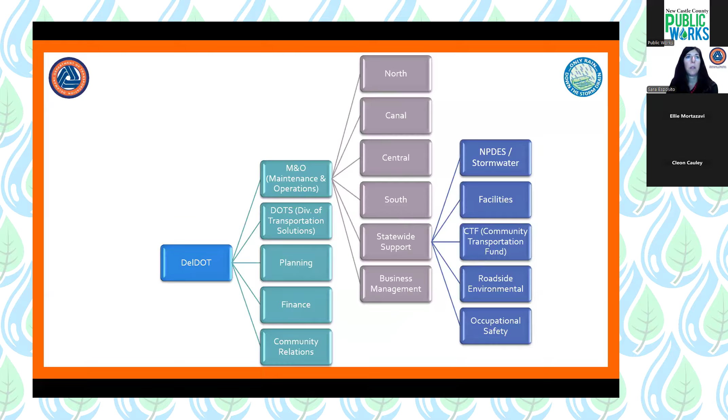I am going to go over who to call within DelDOT with some questions that might arise for you or your community. Let's take a step back from just stormwater specifically and look a little bit more at DelDOT as a whole. Wally here will be helping me along the way.

DelDOT is pretty big and we have multiple divisions. We're going to start in Maintenance and Operations, or M&O, and talk about our North and Canal maintenance districts. Those are the two districts that handle all of New Castle County. We have two other maintenance districts, Central and South, that handle the southern part of the state. We'll also talk about our statewide support services section that houses the NPDES Stormwater Program, which is the program I'm in, as well as our CTF, or Community Transportation Fund.

We'll touch on our snow reimbursement program within business management, and then we'll also talk about our Division of Transportation Solutions and Community Relations.

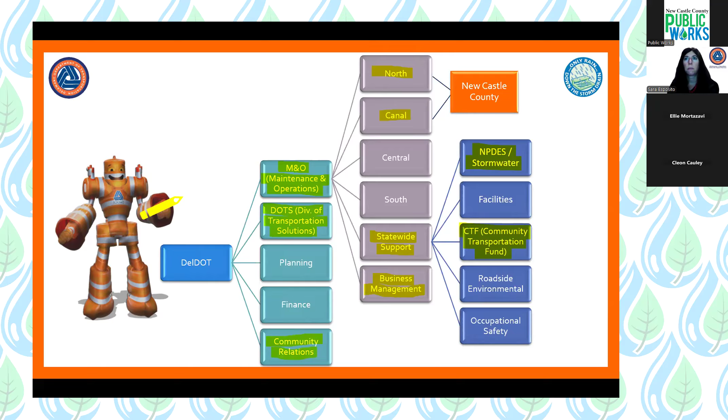Getting started in maintenance and operations, our North District is the northernmost section of Delaware, fittingly, and it is broken down into two main areas that take care of all the roadways within that area by mowing, snow plowing, fixing potholes, picking up trash, etc. within that region. So we have Area 11 shown here in purple.

That's our Kiamensi maintenance yard, and they handle all of that portion. Then our Talley maintenance yard, Area 12, handles the upper northeast corner of Delaware.

North District also has three other areas that handle specialty items, special projects, our expressways section that handles 95, and then our building and bridges section. Here's the contact information for all these locations. You can take a picture, or as Mike mentioned, this presentation will be posted after the presentation.

The southern part of New Castle County is handled by our Canal District, and it is also broken into two subzones. Our Middletown Area 9 maintenance area handles that area in green below the canal, and then our Bear maintenance area handles that section shown there in orange above the canal.

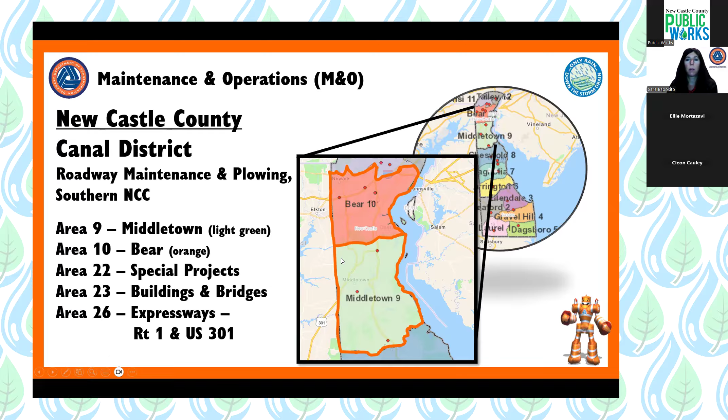Similarly, they also have some specialty areas besides just the two roadway crews, and the contact information for those yards are also shown.

But Wally's here to give you a public service announcement. Number one, the maintenance yards are not DMVs or permitting offices. So although I showed the contact information and the locations, you really shouldn't need to call them or go to them. At the very end of the presentation, I'm going to give you the best phone number to contact that will handle most of any concerns you would have.

Public service announcement number two, you can use the DelDOT app to find out information that you might need. There's a bunch on there. Two that I've highlighted are report an issue, where you can alert us of trash, a pothole that needs to be fixed, any accident, any concern you might have on the roadway, as well as our snow tracker app, where you can see if plows are going to be near your subdivision or main roadway in the near future.

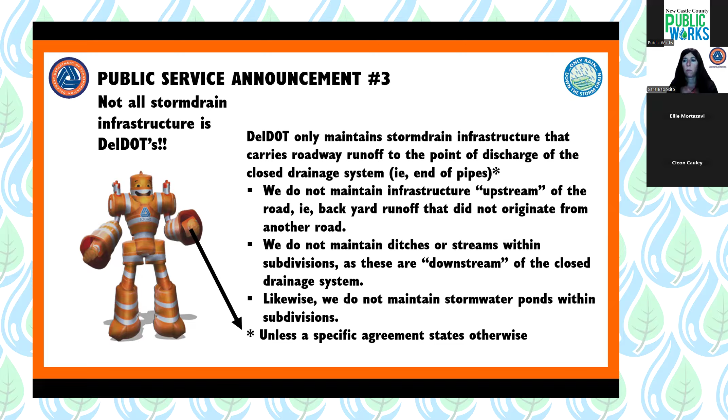A caveat to all that would be, unless there's a specific agreement that states otherwise. There are a few subdivisions within the county that have shared use agreements, where both the subdivision and DelDOT's water are both treated in that facility. So that would obviously supersede what I just mentioned.

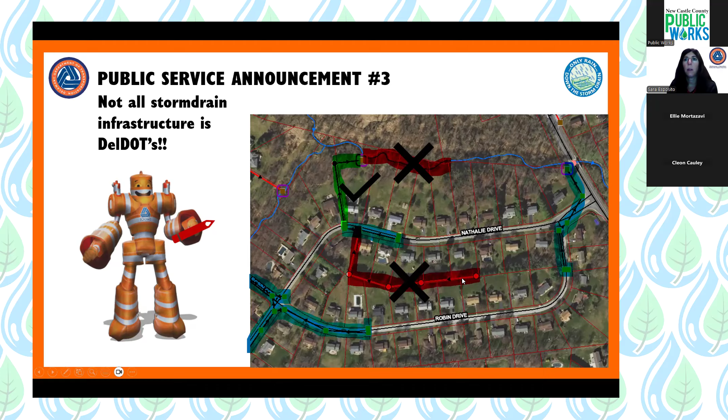So if we look at an example, this is a DelDOT maintained subdivision road. DelDOT would maintain the roadway infrastructure on Nathalie Drive, as well as the rest of the roadways within that community. We would also maintain the pipes downstream of the roadway, as long as those pipes are in a drainage easement and they were there at the time of recordation. But we would not maintain the stream within the subdivision, as that is downstream of the end of the pipe. And we would also not maintain upstream of the roadway that is collecting back of lot drainage, because it's not collecting any roadway runoff. That's true even if that infrastructure was put in place at the time of initial subdivision construction and has been there forever. Because it does not carry any DelDOT flow, we would not maintain it.

If your community has such examples of pipe outside of DelDOT's maintenance purview, then one potential avenue for assistance with drainage issues could be the New Castle Conservation District, and their information is shown there.

Also within the NPDES program, we work hard to make sure that clean water is leaving our storm drain pipes. We inspect our outfalls and screen for pollution, and then if we find it, try to track it back and eliminate that pollution along with the county's assistance.

We, along with the county, maintain this hotline, 302 Stop It, along with 302stopit.org as a website you can utilize to report a water quality concern, whether it's dumping, severe erosion, or anything where you're concerned that pollution is affecting our stormwater. We'll go out and investigate and try to coordinate a fix.

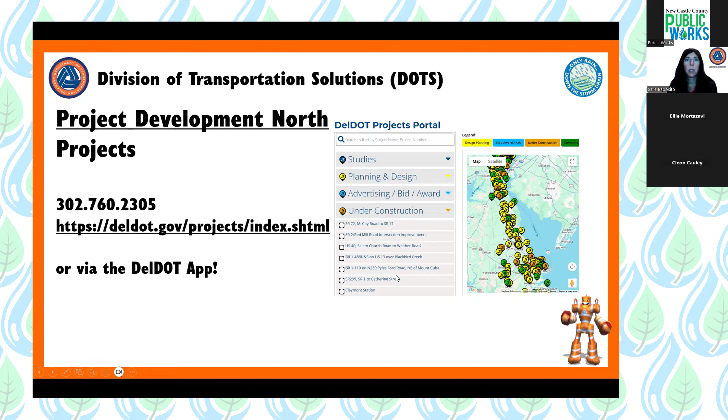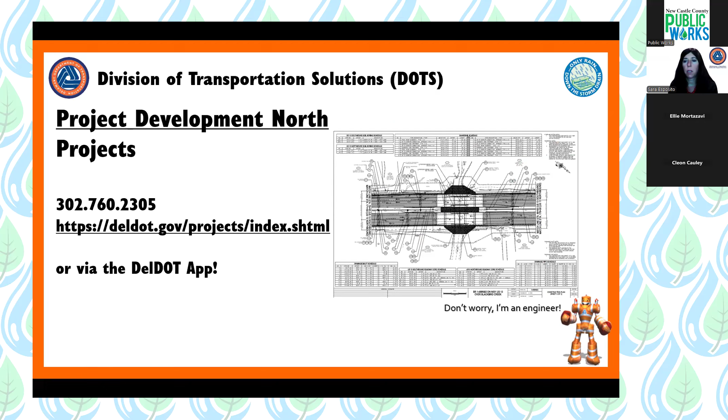You can get all sorts of details, including some of the engineered design plans, which can be a little intense. Most projects also have public workshop information that shows more conceptual renderings of what the project will look like at the end.

They also help coordinate the Adopt a Highway program. If you're a community or affiliated group interested in adopting a highway, it's a great program, and we appreciate all the volunteers out there that help keep Delaware litter free.

We try to keep things informative, but also light where possible. I'm sure many of you have seen our signage, which again is also aimed at being informative, but keeping it light and funny.

At one point we stole my slogan, 'Who you gonna call?' And I'm going to tell you who to call. The best number you can remember, and potentially store in your phone—I have it stored in mine—is our Transportation Management Center, or TMC, at 302-659-4600, or pound 77. That brings you to our 24-hour operations hotline, so it's always staffed and able to take a call.

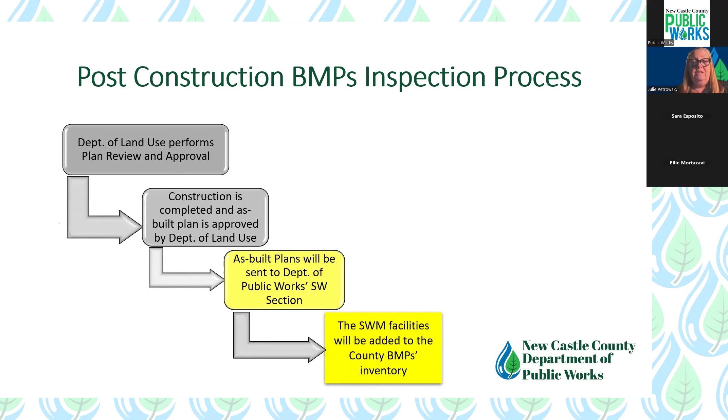Post-construction BMP's inspection process. This is just the outline. So first, the Department of Land Use performs a plan review and approval. Construction is completed, and the as-built plan is approved by the Department of Land Use. Then the as-built plans are sent to the Department of Public Works stormwater section, and the stormwater facilities are added to the county's BMP inventory.

The 2025 BMP inventory: the total number of BMPs for 2025 is 2,955 facilities, and we're just about complete with inspections for this year. I think we have about 100 left to do. It's a mixture of BMPs such as residential, commercial, and industrial sites. On-lot residential BMPs are exempt and not included in our inventory. All BMPs built pre-1991 are also included in our inventory. On average, between 80 to 100 BMPs are added to our inventory each year, so it will be well over 3,000 for 2026.

Once the inspections are completed by the inspectors, letters and inspection reports are sent by email to the president and board members of the homeowners associations or maintenance corporation, with a timeline for performing necessary maintenance. Questions about inspection reports should be directed to the inspectors of New Castle County Department of Public Works Stormwater Management section.

After you receive the inspection report, obtain a copy of the operation and maintenance plan for the stormwater management facility of your site if available. Sometimes we do have older sites and it's hard to find the plans, but we do our best to have them available for you. Obtain a copy of the as-built plan as well as the landscape plan for those stormwater facilities if available. We also suggest hiring a professional contractor who's familiar with the type of work that is needed.

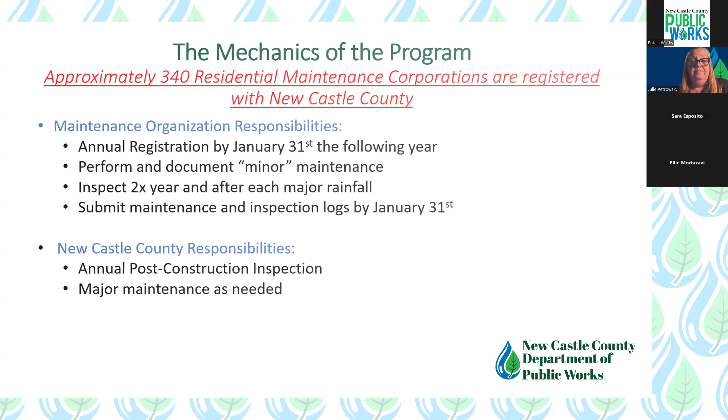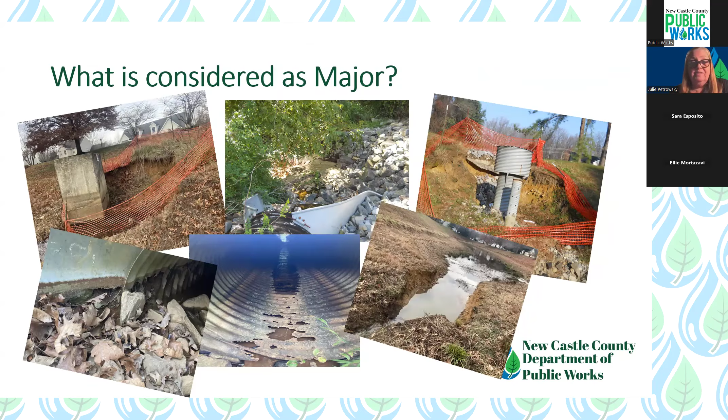So what is considered major? This is what we have seen over the years. When it's major, when it starts failing, it goes quickly. So we have quite a few of them out there. Let me show you some before and after pictures of major projects.

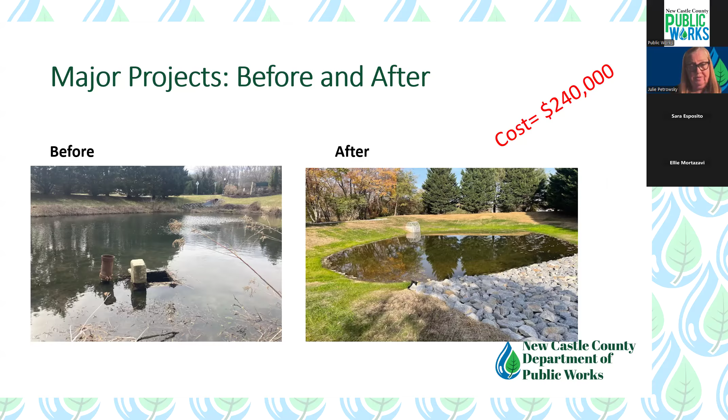This pond has a very old structure. It was re-engineered and completed a couple years ago at a cost of $240,000. Another older dry pond with an older corrugated metal pipe outlet structure was just completed last year at a cost of $100,000.

A lot of questions come in: why hasn't my community stormwater facility been fixed yet? It's a long process. Facilities needing re-engineering are redesigned either by in-house engineers or by engineering consulting firms, and this takes an average of 1 to 3 years. If it's reconstruction or structural repair, a lot of it is performed by New Castle County Construction Support Group or by an outside contractor, usually taking 1 to 18 months. We do have emergency sites that we have to move up to the front of the list now and then.

As Sara went over briefly, illicit discharge detection and elimination - if you see something, say something. Examples of IDDE would be dewatering chlorinated pools. If they're dewatering and emptying out the pools, they have to be dechlorinated first. If we see that happening, we do call for an inspection.

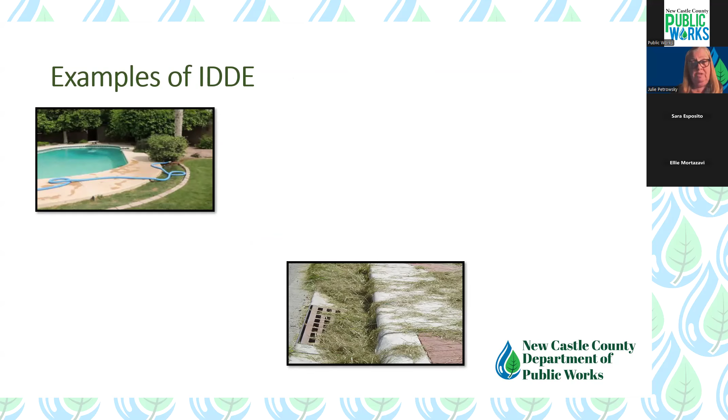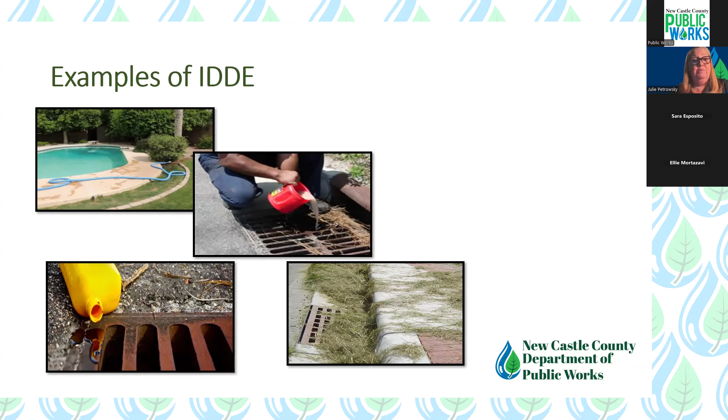Yard waste - we see a lot of this, and we've reported it a lot this past year. Clippings from yards being blown into the street, that is an IDDE. Pouring chemicals, washing paint cans or paintbrushes down the drain - that is not allowed. Changing your car's oil has to be done professionally to capture the oil so it doesn't go into the streets and down the catch basins. And sometimes contractors let extra concrete or paint go down the drain.

If you see any of this, please call to report it. Water pollution is a crime. Don't stand for it, stop it. That number is 302-786-7748, or write to the hotline at 302-STOP-IT.

We're always here to answer any questions, small or large. You can call us. Each inspection report does have the inspector's name, number, and email address. Call us anytime. If you have any questions, we're here to help, and we appreciate your cooperation in bringing facilities into compliance. Thanks for your time.

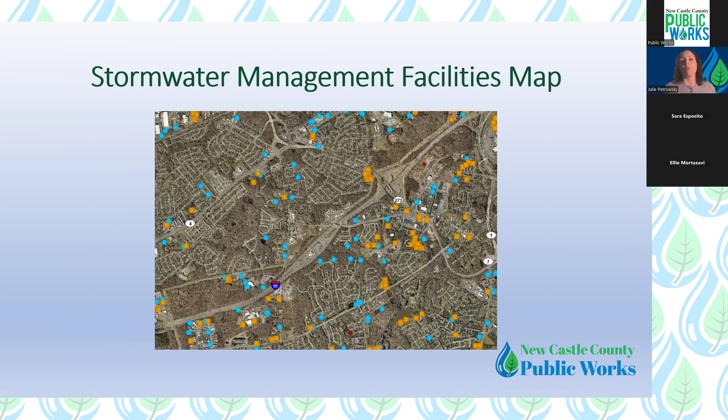Our stormwater management facilities are noted on our GIS map. Facilities are grouped together by location, and each year our stormwater inspectors are assigned to inspect facilities within a certain group or area. If you ever have trouble locating the stormwater management facilities within your community, please feel free to reach out to us and we can email you a map screenshot showing their locations.

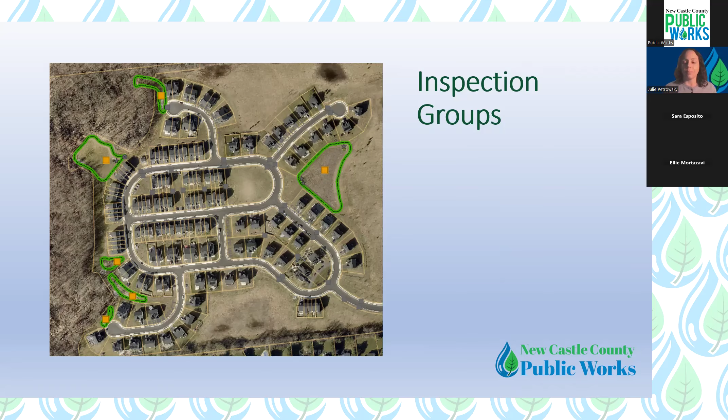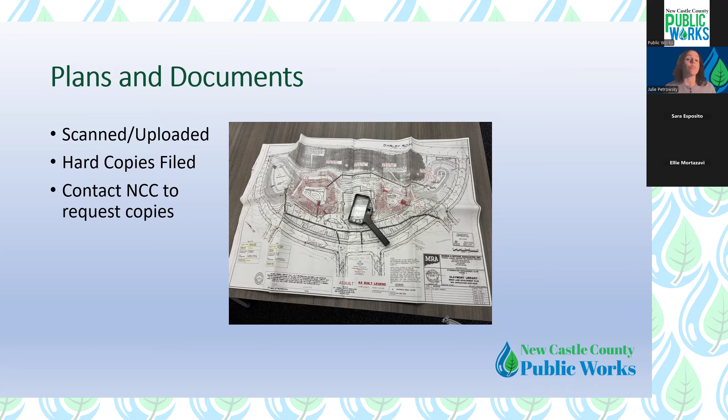The approved plans and documents for each facility are scanned and uploaded into an online database, and hard copies are filed as well. The approved as-built plans and landscape plans for your facility will show how the facility is designed and tell you how it's required to be maintained. It's very important that you have a copy of these plans and share them with your hired contractor so they understand exactly what needs to be done. If you can't locate the plans for your community, please feel free to reach out to us and we can email you a copy.

The as-built plans show how the facility is designed and provide maintenance instructions. There's usually a section on the as-built plan noted as the operation and maintenance plan or operation and maintenance schedule. This tells you what type of maintenance should be performed and how often.

Per New Castle County Code, stormwater facilities must be maintained according to the approved design plan. That means you are unable to make any changes to the facility that would alter it from that design. If you did want to make changes, you would need to hire a professional engineer to red mark the as-built plan with those desired changes and submit that to my office for review. If we approve the red marked plan, then you would be permitted to proceed with those changes, but you must receive that approval from us first.

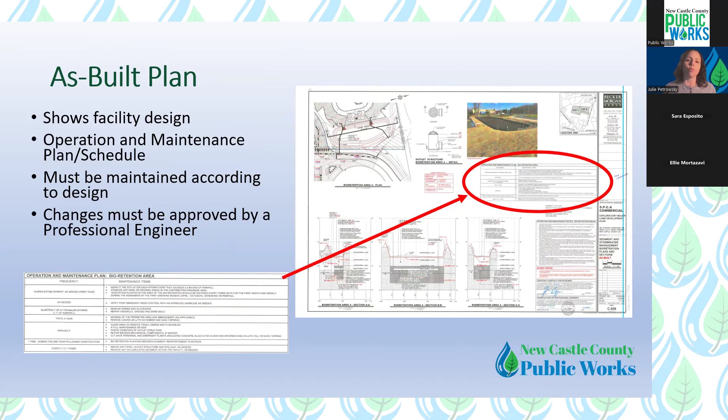The landscape plan shows any plantings that are supposed to be in place. You will see a plan view with symbols or abbreviations and a plant key, which tells you what they stand for. In this example, on the right side of the facility, you see that there are 10 VD. And when we look over at the plant key, we see that VD stands for Viburnum dentatum, or arrowwood shrubs.

So that's how you use the landscape plan to identify what type of plants are supposed to be in place and where. Unfortunately, no substitutions are permitted. Again, per New Castle County Code, the facilities must be maintained according to the approved design. So if you wanted to make any substitutions or changes to the plantings, you would need to hire a registered landscape architect to red mark the landscape plan and submit that to my office for review and approval prior to making the changes.

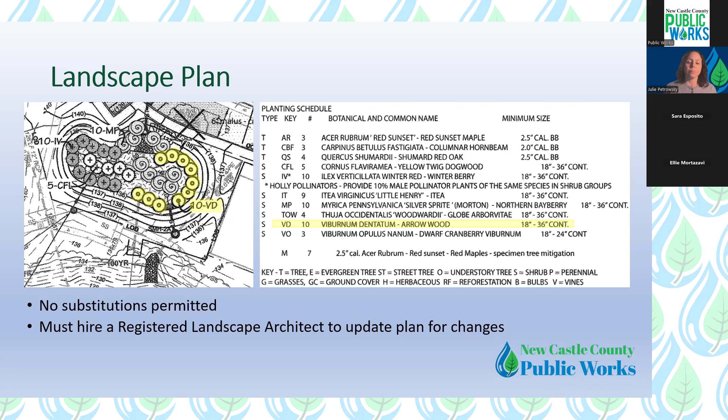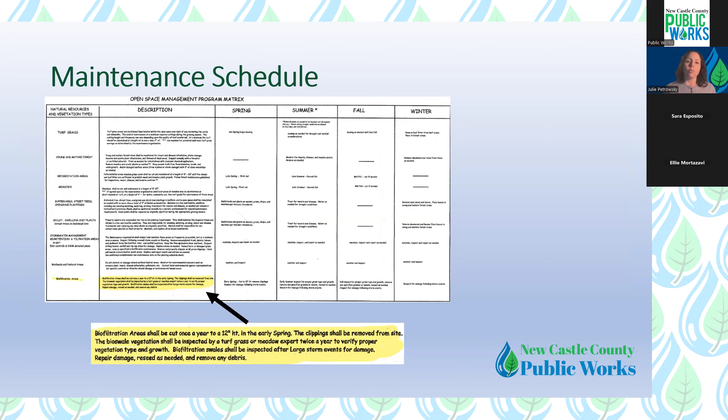There's also usually a maintenance schedule on a section of the landscape plan. If you have bioswales that are supposed to be maintained at a certain height, this is where you would find that height requirement and mowing instructions. In this example, we see that the biofiltration areas, or the bioswales, within this community are supposed to be cut once per year to 12 inches in height in the early spring, and the clippings removed from the site. So that is where you would find that information on the maintenance schedule.

We use a program called CityWorks for our asset management software. Through CityWorks, each facility in our inventory and each inspection report are tracked. Each facility is assigned a unique 5-digit ID number. Ponds begin with the number 1, and all BMPs begin with the number 2.

We inspect each stormwater management facility at least once per year, and we will generate our annual inspection reports based on those inspections, and they will be sent out to the Maintenance Corporation.

On the first page, the cover letter of your annual inspection report, we will identify the location and unit ID of the facility. And in the bottom paragraph there, we will list the inspector's contact information, and we ask that you follow up by sending before and after photos of the corrected deficiencies.

On the second page of the report, we will again identify the facility, we will list a brief summary of the inspection results, and we will list the number of days you have to comply. Again, we will list the inspector's contact information below our signature, and we again ask that you follow up by emailing us photos to show that the deficiencies have been corrected.

As long as we can see that everything has been completed from the photos that you send, then we can mark you compliant based on that. So that is the fastest way to get you back into compliance, by emailing those photos to us. If you're unable to send photos for some reason, please reach out to us and let us know once the work is complete, and we can stop by and complete a reinspection the next time we're in that area.

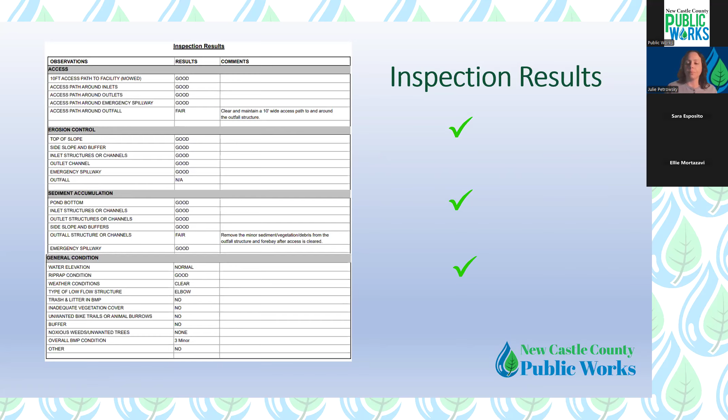We do take photos during our annual inspections. It's not possible to send those photos with every report we send out, unfortunately. But if you'd ever like to see the photos from your inspections, if you think that would help you identify the comments in the report, please feel free to reach out to the inspector listed in your report, and we'd be happy to send them to you at that time.

If we don't hear from you after your annual inspection and we determine that routine maintenance is not being completed, that is when our violation tracking process starts. The first step is to issue a warning letting you know that if the necessary maintenance is not completed, a notice of violation will be issued. If the work still isn't completed after the warning, we will issue the notice of violation, which goes over the specific maintenance responsibilities being violated according to New Castle County Code Chapter 12, Section 6. In other words, not completing maintenance to county standards is a direct code violation, and that's what the notice of violation document addresses.

Chapter 40, Section 27 of New Castle County Code covers maintenance organizations and the stormwater maintenance program, as Bernadette discussed. As she mentioned, the community must keep up with routine maintenance to remain eligible for the stormwater maintenance program, where New Castle County covers the major costly repairs. I added a link at the bottom of the slide to New Castle County's Code of Ordinances, but you can also just Google New Castle County, Delaware Code of Ordinances, and it should be the first website that pops up.

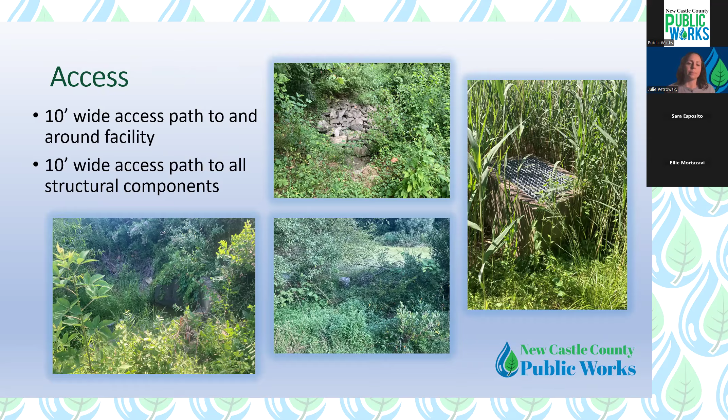Getting into our actual inspections: while on site, we go over our checklist and observe each line item noted in the annual inspection report. The first thing we look for is access. There should be a 10-foot wide access path maintained to the facility and to each structural component at all times, so we can see everything needed to complete a thorough inspection. We also assess the condition of each structure, looking for signs of rusting or corrosion, cracks or spalling, or any signs that the structures may be failing or in need of repair.

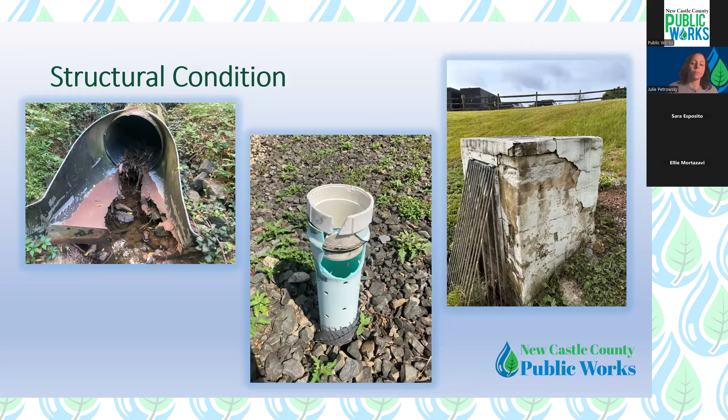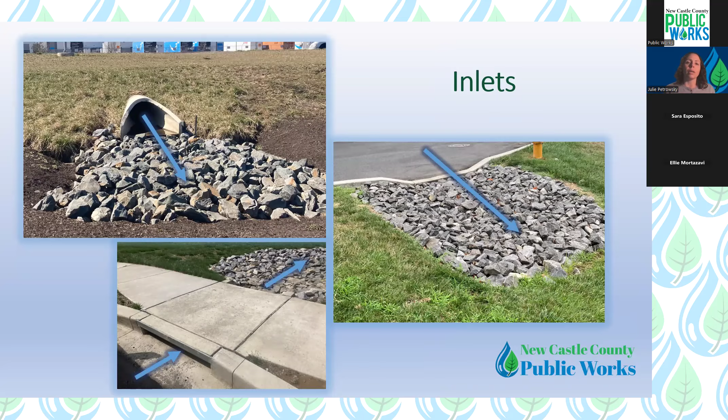The inlet structures are where water flows into the stormwater facility. They can be pipes, depressions, or cuts in the curb. They usually have a riprap-lined forebay or rock-lined apron area designed to slow down stormwater and prevent erosion, helping to collect sediment and debris as it washes in. Those areas just need to be cleaned out on a routine basis.

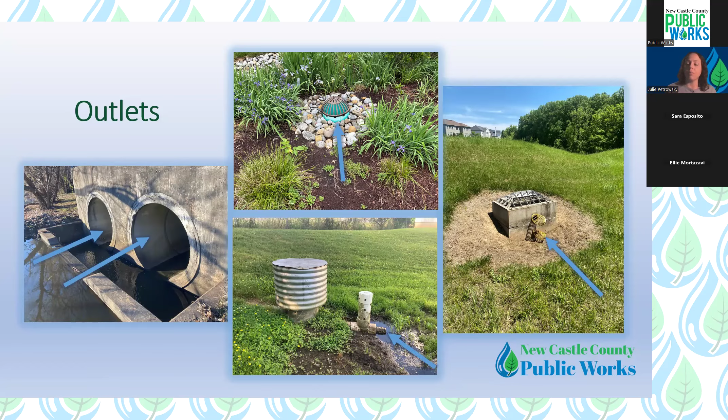The outlets are where water exits the stormwater facility—inlet in, outlet out. Outlets can be various types of pipes or risers, and often have a trash rack on them. A trash rack is a device, usually a type of bar or grate, designed to prevent debris from washing into the structure. In this example, you can see this outlet structure has quite a few trash racks on it. So when we note in the reports to remove minor debris from the trash racks, this is what we're referring to.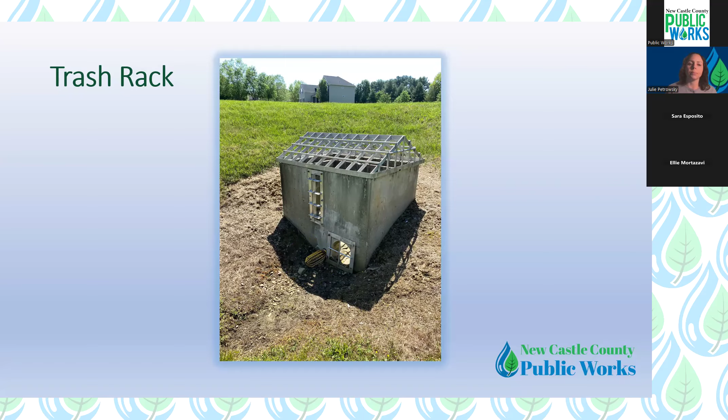The low flow structure is a device on or connecting to the outlet structure, where the lowest level of stormwater flows out. It can be an orifice, an elbow fitting, or a weir. These structures need to be cleaned on a routine basis to make sure the facility drains properly. If you have standing water in your facility for an extended period, or the water level in your pond is too high for too long, the low flow is most likely blocked, so that should be the first thing you check. Also, if the low flow remains blocked for an extended period, it can put extra stress on the structure and contribute to structural failure. So please make sure your hired contractors are keeping an eye on this during routine maintenance.

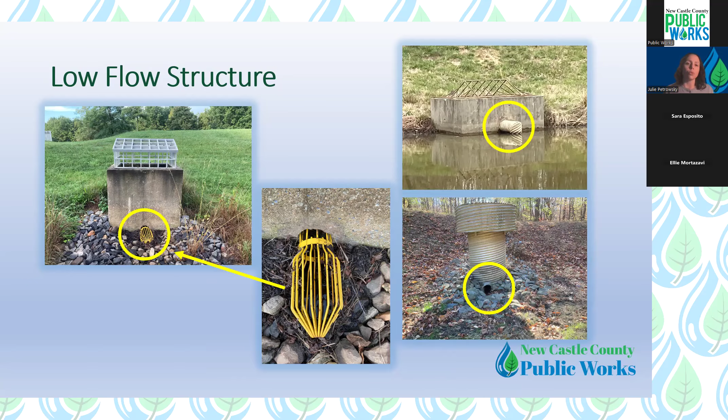The low flow channel, as it sounds, carries the lowest level of stormwater directly to the outlet structure. These are typically lined with concrete or stone, but can be more natural, like an inline pond resembling a small creek or stream. The low flow channels just need minor sediment, weeds, and debris removed from them on a routine basis to prevent blockages and encourage a positive flow of water.

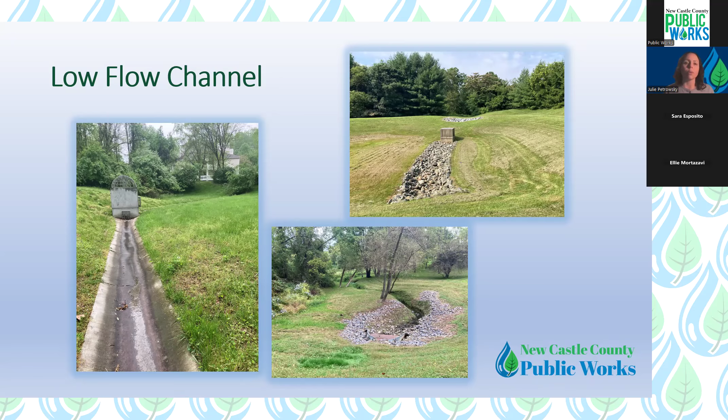We mentioned that inlets are where the water goes into the facility and outlets are where the water exits out. The outfall is the final discharge point of the stormwater, or the area which your facility drains to. Just like the other structures, outfalls need to have minor sediment, weeds, and debris removed from them and need to have an access path kept to them.

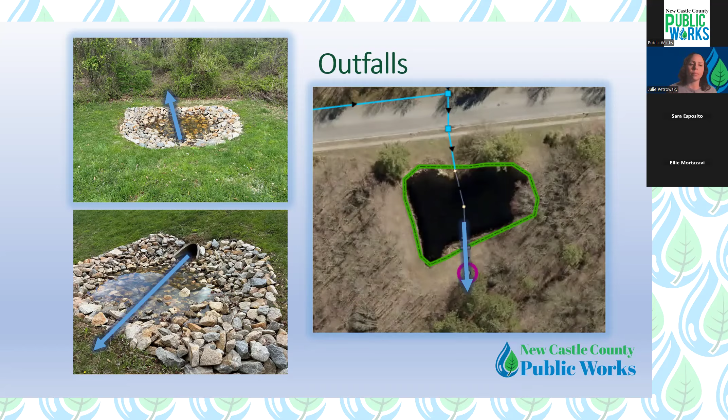An emergency spillway is a low area on the side slope. In the event of a severe storm, if your stormwater facility completely fills up with stormwater and tops over the outlet structure, it will spill over through that low area. They can sometimes be lined with riprap or rock, as with the picture on the right, or sometimes they're simply grassed, as with the picture on the left. We check them for signs of erosion or bare areas during our inspection, and we will also note to remove minor sediment, weeds, and debris as necessary.

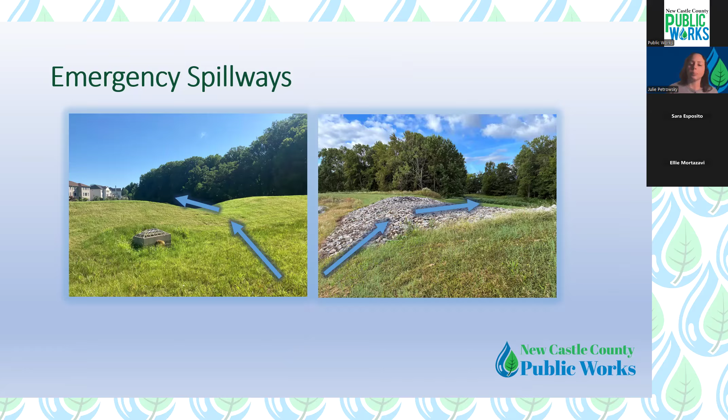If you have an underdrain system in your stormwater facility, there will be a small pipe that runs horizontally below the surface. This pipe will assist with infiltration or it will drain to an outfall area. There will be monitoring wells or inspection ports - those are the plastic stick-up pipes. We use them to check the underdrain system to make sure it's functioning properly. During our inspections, we will open the caps to the monitoring wells or ports.

We will look inside. Sometimes we will insert a measuring stick to see if standing water is present or if there's any sediment building up in there. And if there is, then they may be required to be flushed or cleaned out at that time to alleviate any blockages.

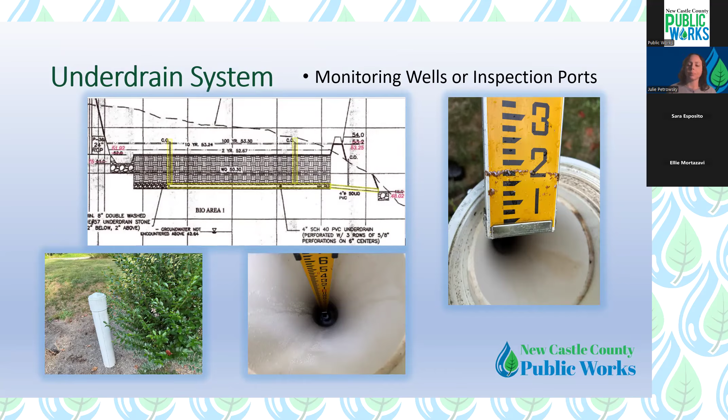If you do have monitoring wells within your facility, especially if it's a grassed area like a bioswale, please make sure that your mowers are aware of their locations. Unfortunately, a problem we commonly see is that mowers will crash into them and break these plastic stick-up pipes. And if your mowers do break your monitoring wells, the community will be responsible for repairing or replacing them. So please make sure that you hire competent contractors and provide them with copies of the approved plans so they can see where these structures are located.

We look for animal burrows. Any holes or burrows will need to be filled in and compacted and any resulting sediment removed and the area stabilized. I do know that some animals can be persistent and continuously repairing the burrows can seem like a never-ending battle, but it is an important part of routine maintenance. It should be kept up with in order to keep the facilities in good condition and functioning properly.

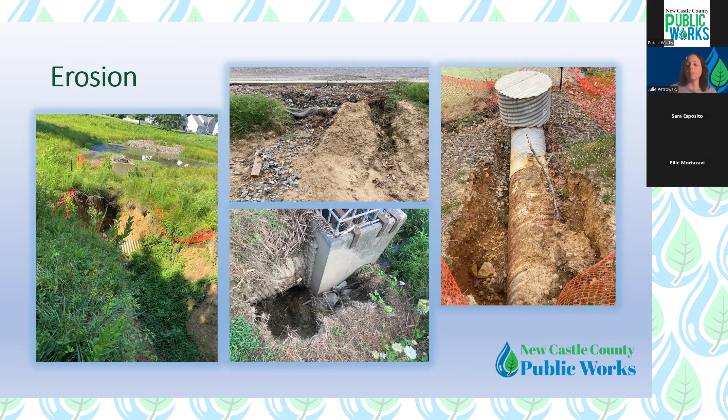I want to take a minute to emphasize that plastic netting is no longer permitted to be used in Delaware for stabilization. It's a hazard to wildlife - birds and snakes and other wildlife frequently get caught in it. If it is used at your community, you will be required to have it removed and done over with the appropriate biodegradable matting. Most contractors, all contractors, should be aware of this requirement, but unfortunately we still see it being used a lot. So please make sure your contractors are using the correct stuff.

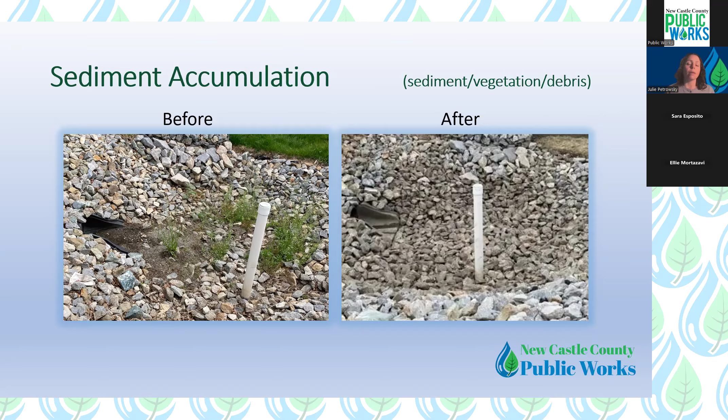We went over the landscape plan earlier in this presentation. We check the condition of the vegetation while on site. If there are required plants that are supposed to be in place, we make sure they are in place according to the plans. If there's a type of vegetation or grass that's supposed to be maintained at a certain height, we follow up on that. Please refer to your approved plans for any specific vegetation requirements.

We also look for unwanted vegetation—any weeds or invasive vegetation, young trees, or woody vegetation. They will all need to be treated with an appropriate herbicide and then cut and removed from the site. This should be kept up with on a routine basis. When weeds get out of control, especially invasive vegetation, it is very hard to get back under control, and it can get expensive to treat when it gets really dense. Make sure your contractors are keeping up with the weeds and invasive vegetation routinely.

In Delaware, it is required to have a special license to apply aquatic herbicides. Make sure your hired contractor is able to take care of that if it's noted in your report. We do get a lot of questions about the use of herbicides and how safe they are for the natural environment, but as long as they're used appropriately and according to the manufacturer's specifications, they are deemed safe. If you have any specific questions about the types of herbicide to use for weeds at your facility, we recommend reaching out to a contractor who has their aquatic herbicide license.

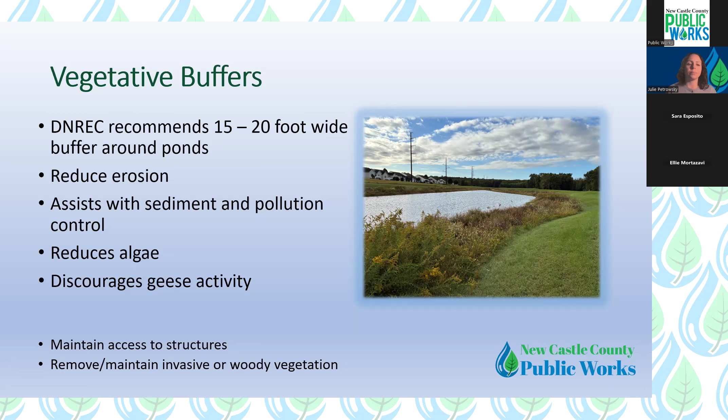Getting into more detail about the types of stormwater facilities you will commonly see in residential communities within New Castle County: wet ponds or retention basins are ponds that have a permanent level of water in them at all times. Your approved as-built plans will tell you what the normal water level should be. If the water level is too high or too low for an extended period of time, there may be a leak, a blockage, or some other issue we need to look into further. Please make sure your contractors are checking your low flow devices routinely to help keep the water level at its proper level.

Dry ponds or detention basins are designed to fill up with stormwater and should drain completely within 48 hours after the rain has stopped. If standing water remains longer than that, there's most likely some kind of issue—again, please check your low flow devices to make sure there are no blockages. It is okay to let the grass vegetation grow taller in these dry ponds, as long as it's maintained free of invasive and woody vegetation, and as long as you maintain access to each of the structures.

Infiltration basins are designed for water to infiltrate or absorb into the ground. Sometimes they will have an outlet structure or an overflow structure, but the majority of the water is designed to infiltrate in these basins. Like dry ponds, they should be completely drained within 48 hours after the rain.

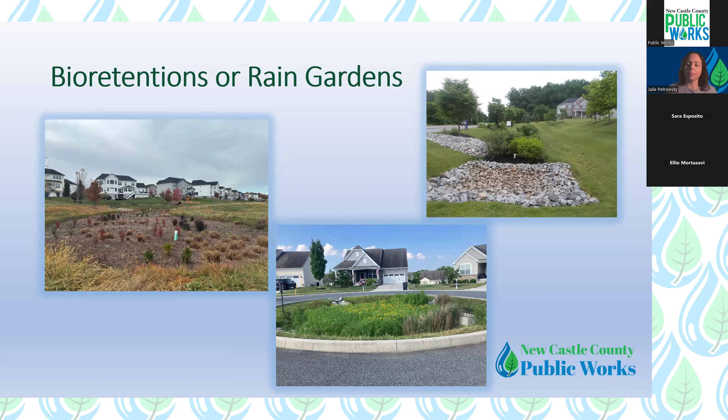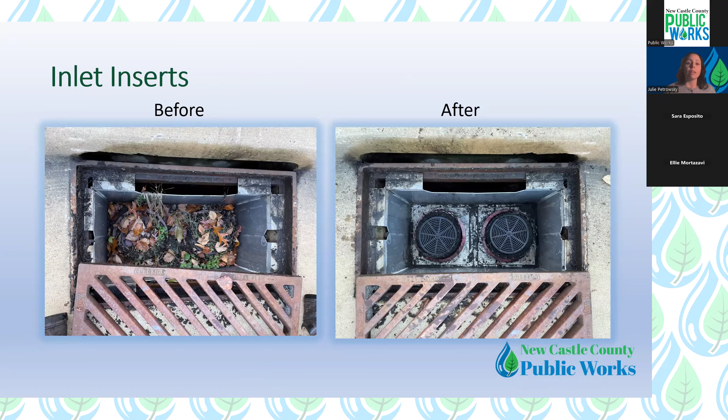Inlet inserts are a type of filter bag or cartridge that sits inside of a catch basin drain. They are designed to trap and filter out dirt and debris, and they just need to be cleaned on a routine basis. In the photos here, we have an example of what one looks like before and after cleaning.

We don't have a ton of underground facilities within residential communities in New Castle County, but there are a few, so I just wanted to touch on them really quickly. Underground facilities are a type of tank or storage chamber beneath the surface of the ground. Specific maintenance and inspection requirements are required with these facilities, so if you do happen to have one in your community, please make sure you hire a contractor who is familiar with working on those types of facilities.

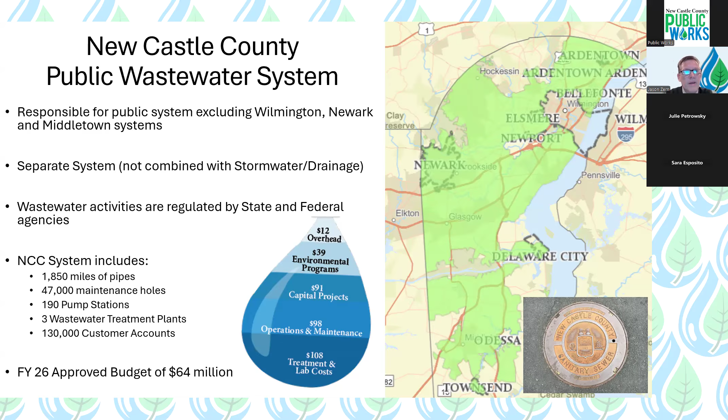We can determine whether or not the pipe has some kind of clog or partial blockage, and that alerts us that this is a pipe that needs to be cleaned. The technology is much less expensive than having to clean or TV a pipe, and it's also much quicker, so we're able to get to more of our system than we normally would. We do remote monitoring and regular visual inspections of all of our pump stations.

We have a FOG and roots treatment program, FOG being fats, oils, and grease. I'll talk about that a little bit later in my presentation. We do have to react to unexpected issues as well.

We are operating 24 hours a day, 7 days a week with our dispatch office. So if you have any issues, any time of day, nights, weekends, holidays, we generally can respond within about 2 hours. We also have our own in-house construction crews, which allows us typically to get to some more emergency repairs quicker than if we had to contract everything out.

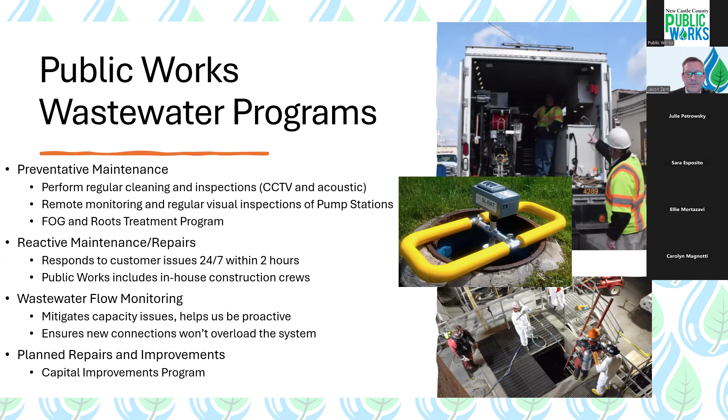We also have a fairly extensive capital improvements program where we handle a lot of our repairs or rehabilitation projects, again in a much more proactive way rather than just waiting for the sewer to fail. So those are some of the programs that we use.

I wanted to talk a little bit more about what your own wastewater management programs might be.

Not a lot of people know that MC Hammer's hit "Can't Touch This" was actually originally a Public Works advertising campaign, and it was called "Can't Flush This."

The way you can help maintain our sewer system is simply by paying attention to what you flush down the toilet or put down the sink drains. There's a lot of things that say they're flushable, like flushable wipes, but they still cause issues in our sewer system, so we recommend not putting them down the drain.

The number one cause of sewer issues is grease—fats, oils, and grease from cooking really cause a lot of problems to the sewer system. And if they cause problems to our sewer system, they can certainly cause problems to your own sewer laterals. Often people have issues with their laterals from dumping fats, oils, and grease down their own sinks, so that's something we're asking everyone to avoid.

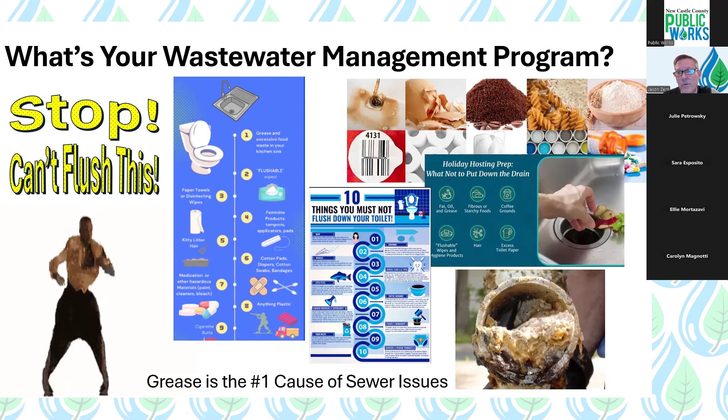So just a couple of tips to keep in mind. If you're going to plant trees or shrubs in your yard, it's good to know the location of your lateral. There's a call number if you're going to do any digging—Miss Utility is who you have to contact. One thing to note, though, is Public Works only locates the connection of where your house connects to the public sewer. It does not locate the entire lateral, because that is a private asset under the responsibility of the homeowner. But it is good to know where that lateral is.

You can hire a plumber to locate it for you. There are root barriers you can install when putting in a tree or planting shrubbery that help block tree roots from getting into your sewer lateral. There are also varieties of bushes and trees that are smaller and slower growing, so there won't be as big of an issue with your lateral.

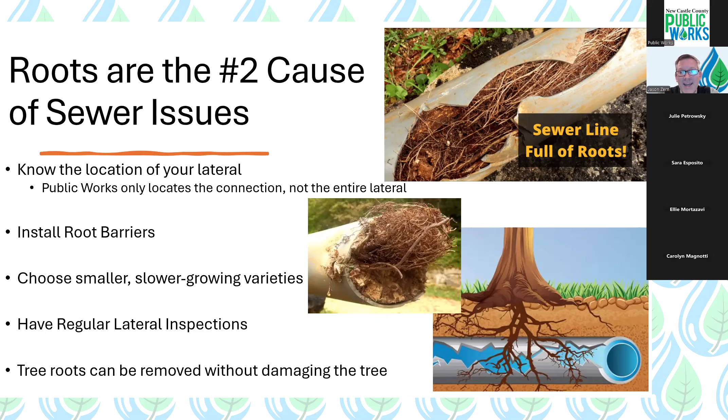If there are tree roots within your lateral, there are ways to remove them without damaging the tree. They can either be cut out, or some plumbers have a foam that kills off some of the roots and prevents them from regrowing, without damaging the tree.

Another issue our department runs into a lot is that homeowners and plumbers aren't sure who's responsible for what part of the lateral. If you look at this diagram, the property line is on the left, and that property line could denote a public right-of-way, like the street in front of your house, or an easement that runs across your property. The portion of your lateral within that public easement or right-of-way, Public Works will take care of any repairs or replacements that might need to happen. But that's really the only responsibility we have on your lateral within the public right-of-way.

If you need to have your lateral cleaned, your plumber is responsible for cleaning from the house all the way to the sewer main, the public sewer pipe. A lot of plumbers stop right at the property line and tell property owners they need to call New Castle County to clean the rest, and that's just not the case. We respond to a lot of issues where a plumber cleans only a portion of the lateral and doesn't complete the cleaning. So when we come and inspect, we have to tell the property owner they simply need to rehire their plumber to clean all the way to the main. I wanted to make sure that part is clear for everybody.

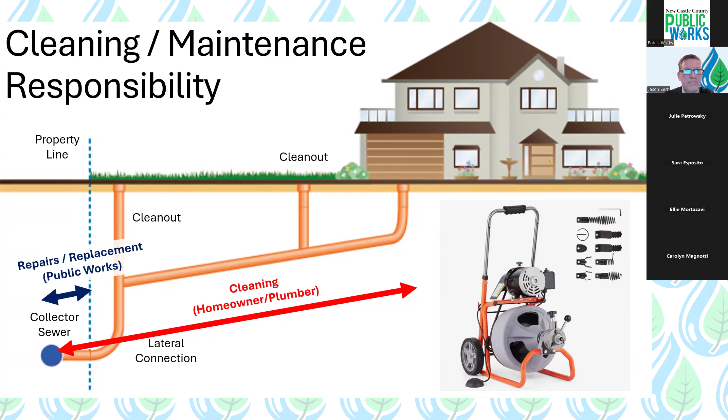If you do have a slow or backed up drain, we would always recommend to call us first. Our phone number is 302-395-5700. That number is active 24 hours a day, 7 days a week, with either our live dispatcher or we have a call service overnight.

We would recommend that you give us a call first before you call a plumber. What we will do is dispatch one of our sewer maintenance supervisors. They will first inspect our public sewer system just to make sure there's no issues with that. Obviously, if there's an issue with the public sewer system that's affecting your own service, we will take care of that issue with the public system, and hopefully that'll restore your own service back to normal.

If we inspect and there is no issue with our public sewer system, then we will advise the property owners to hire a licensed plumber to inspect and possibly clean the lateral. The plumber should clean the lateral all the way to the collector sewer. They should not stop at the property line. They should also remove all the roots. A lot of times plumbers might not have the right equipment or might not be able to stretch that length to get all the way through the lateral.

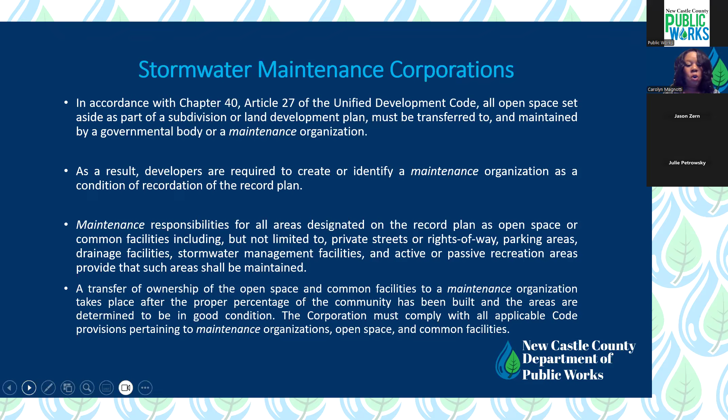And then a transfer of ownership happens after the open space and common facilities reach a certain percentage of build out. Once we've determined that the open space is acceptable, it's then transferred to the maintenance corporation. That's where you start receiving things like inspection reports and maintenance responsibilities. Up until the time of transfer, it's really the responsibility of the developer, but once it's been turned over, it becomes your baby.

So in 2006, with the increase in development throughout New Castle County, the number of residential corporations was increasing. New Castle County soon recognized the fact that homeowners were going to be responsible for maintaining these stormwater management facilities, especially those with costly major repairs, right?

So what happened was we came up with what was initially called the amnesty program. That said that if you signed up, if you maintained your facilities, we would come in and take care of those costly major repairs. It was called amnesty because during that certain period, we were allowing corporations to come in that had never really been involved with New Castle County before. But at some point, it turned over to what is now called the Stormwater Maintenance Program.

And for those communities who meet the eligibility requirements, New Castle County agrees to complete costly major repairs to your facilities when it's needed and when the funding becomes available. So what do you have to do to be eligible for the program?

You have to complete your annual registration, and again, it is an annual process. Sometimes we get individuals who say, well, I've already done that. Well, sometimes board members change, sometimes property management companies change. And so again, we ask you to complete this on an annual basis.

You're also supposed to perform all of your routine and minor maintenance. The reports that Julie talked about will identify those items that are your responsibility, and we ask that you complete those in the time frame allotted. You also have to complete any minor maintenance or minor repairs, and submit an annual inspection and maintenance log. Some of you have already started to send those in, and we really appreciate that.

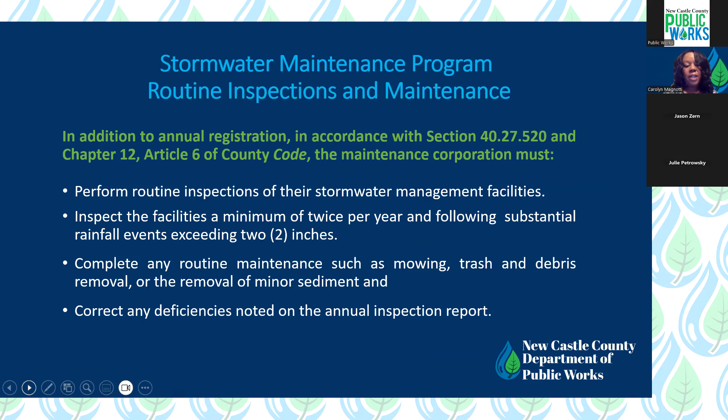Let's talk a little bit about your maintenance requirements. You should perform routine inspections on your stormwater management facilities, a minimum of twice per year and following any major rainfall events that exceed 2 inches. You want to complete any routine maintenance, and a lot of this you've already heard, such as mowing, trash removal, and removal of minor sediment. And you want to correct any deficiencies noted on the annual inspection report.

If this is not done, the maintenance corporation may no longer be eligible for assistance with major repairs. A notice of violation is issued, and if we still don't get any resolution at that point, letters might go out to the community advising them of our inability to get the issues addressed. That is really a last resort. We do not want to have to reach out to every community member to let them know that we haven't been able to get the repairs done and that there might be a chance of you not being covered for major repairs.

We want you to know the Department of Public Works does desire to work with the board on addressing outstanding deficiencies, as opposed to reaching out to that level where we have to contact the community. That's not our desire at all. As Julie mentioned earlier, if you need an extension, please reach out to your inspector and we can grant extensions. If we have to develop a plan, we can develop plans. Whatever we need to do to protect you and to keep you in compliance, we are willing to work with you, and we do.

So for the logs, you're going to complete either a log for a pond or a BMP, or both if you have them. We do have some communities that have 24 or 25 different facilities, and if that's the case, we do need a log for each facility. If you happen to have an underground facility, as Julie mentioned earlier, you have to submit a separate underground log.